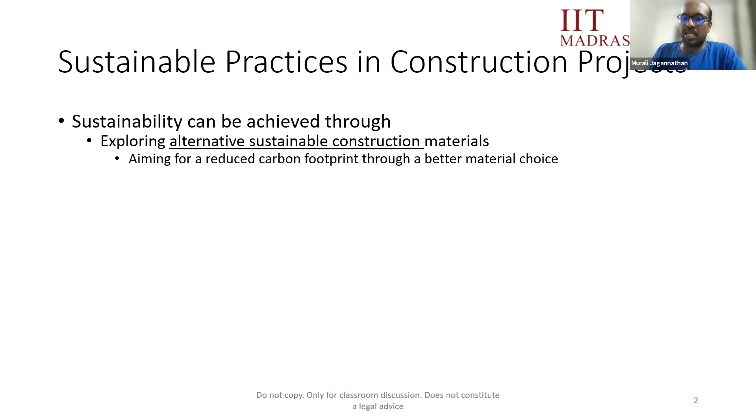That's one direction we look at when it comes to making our projects more sustainable, aiming at reduced carbon footprint through better material choice. The second is we try to improve our project performance through alternative construction processes.

If you take any construction project, there are two major things involved. One is the materials and resources you're going to employ in that project to deliver the final outcome. The second is the methodology or methods you're going to use to deliver this outcome.

Let's say, for example, I use certain equipment to deliver the outcome, I use some drawings to deliver the outcome. So I use certain processes focused on achieving the final objectives as agreed in the contract with my employer. Now, the problem is...

these processes that I follow in projects are mostly prone to delays. For example, you take any construction project, especially many public infrastructure projects, and we see that they are delayed.

There's a metro construction going on very close to my house in Chennai. It's been going on for 3 years. It's not such a massive project that it would take really 3 years to complete, but for some reason or the other, the project keeps getting delayed.

There's also a stormwater drain project going on very close to my house. It's quite a broad road, but almost three-fourths of it is closed because of this project, which has been running for 1 year. It's not a very mega project, it's quite small, and should not take 1 year—definitely 2-3 months, but not 1 year. Yet it's still going on.

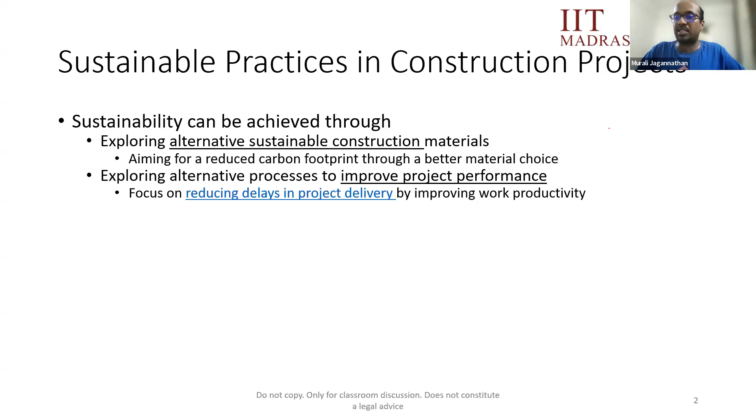If I don't do the work I have to do in a day, which is called productivity, my project is going to get delayed, and the delayed project has its own impact on the environment, on sustainability, and on the way of life, as we've just discussed. So in today's presentation, I'm going to focus on these two aspects when it comes to construction practices and construction projects.

When I say alternative construction materials or alternative construction processes, I am talking about something different from what we do regularly. And the moment we try to do something different, it is always met with resistance.

Because in general, as human beings, we are resistant to change. We don't want to change. We are happy with what we are doing. Yes, we may not be following certain sustainable practices, and we may not be following practices that actually help us complete the project on time, agreed. But when somebody wants us to change, we automatically feel the difficulty to change.

And that is a natural human tendency. It's not so easy to change things, and it is not so easy to change certain practices that you have been adopting for so many years.

The way I pour concrete is the way I pour concrete. And if somebody asks me to change the way I pour concrete, I will resist, because I am expert in pouring concrete the way I pour concrete. So why should I change?

I'm using normal Portland cement, ordinary Portland cement, OPC, since so many decades. Now you suddenly come and ask me to change to some sustainable variety of cement. Why should I change? I'm happy with what I'm doing. So that resistance to change is something that is actually inherently present in most human beings.

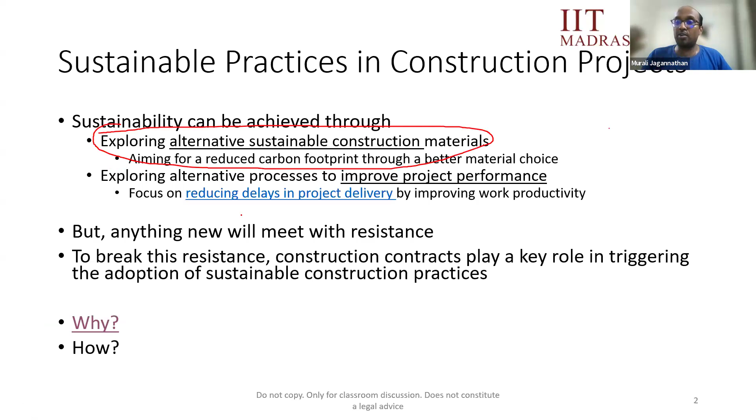We are all from academic institutions, right? As part of our day-to-day academic exercises, research is a very important component. We keep working on so many new ideas, especially our colleagues on the materials side. They do a lot of concrete testing and new mix designs aimed at improving the properties of concrete. Here in IIT Madras and most institutions, you keep working on new inventions that help the world be a better place.

Specifically, materials researchers and concrete researchers are known to come up with innovative mix designs that make concrete a better material. So you have rapid hardening concrete, ultra lightweight concrete, foaming concrete, self-compacting concrete - a whole range of different sustainable concreting alternatives.

A lot of students here, that is students of my colleagues from the material side, work on sustainable concrete. They try to come up with mix designs that replace conventional cement with more sustainable materials, to make the product less carbon intensive and less prone to carbon footprint. They're coming up with a lot of alternative materials, and they're quite successful in that.

They do some mix designs, cast some cubes, test it, and come up with interesting results. They're publishing in various excellent top-notch journals, getting international appreciation, presenting in conferences. Everything is good, and most of us here are doing that as part of our academic exercise - coming up with new and innovative ideas, publishing our research, and taking our academic profile further.

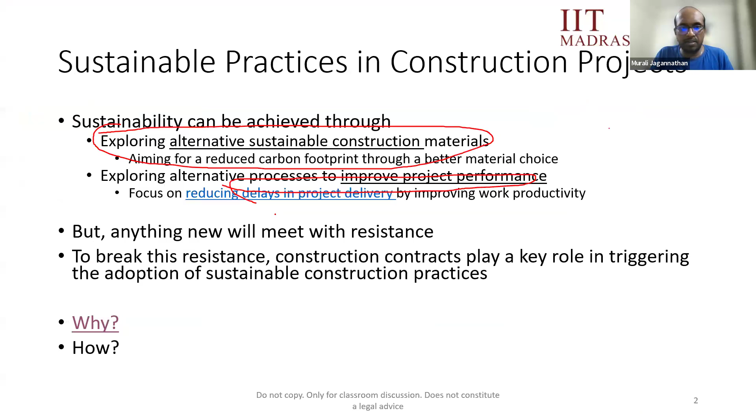And my next slide is going to be something about that. Dr. Suryadev Singh talks about planning and monitoring, and that's exactly what I'm going to talk about next. If you look at the way construction projects are actually executed... just give me a second... Yeah, sorry. So if you look at the way construction projects are executed, there is a fundamental problem.

Now what you see on the screen is quite interesting data that talks about the time and cost performance of our projects. This is particularly projects done at the central level, only certain projects valued at 150 crores and above. You find this in the report of the Ministry of Statistics and Programme Implementation, the MOSPI report. Look at these numbers: if it's time overrun, roughly 41.59% of projects suffer from time overrun. I'm talking about 1,500 odd projects, roughly, which is about 600 projects suffering from time overruns.

This time overrun, as I discussed with you some time ago, is directly contributing to unsustainable construction practices by affecting the way of life, regular traffic, and the sustainable development goals we have promised ourselves. Also, in terms of cost, roughly 20% of the project cost is suffered as an overrun. In numbers, this translates to 4.5 to 5 lakh crore rupees. Even if I don't bother about cost overrun at this point, I'm more concerned about time overruns, which is huge and having a huge impact on the way I deliver projects and the sustainability of construction.

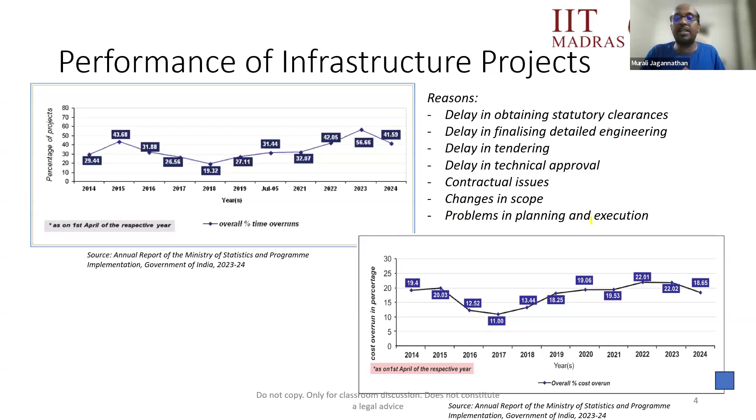Now, how do we control this? It's very easy to say don't delay, don't change the scope, do proper planning, do proper execution. All very easy to say, but how do you actually do that? Only when you control this can the project delay be controlled, because delayed projects impact sustainability, and this is where I am introducing you to the concept called lean construction.

A solution for all these delays, which according to me is a powerful solution, is what we call lean construction. This construction technique, if we follow it in projects, can actually reduce waste. One of the wastes we are talking about here is delay, and delays can be reduced if we put lean solutions into the project.

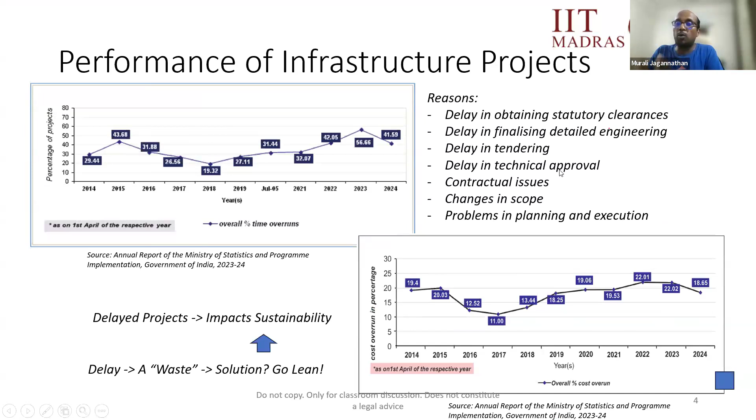Now some of you might be thinking, what is lean? Many of you might already know about lean construction, but I just want to bring in this concept with you all so that even if you already know about it, we go through some basics to bring us on the same page. Understanding lean construction is important because that is only going to help us in reducing these problems, and reducing these problems can take our projects to more sustainable practices. So, what is lean construction?

Lean construction is nothing but identifying certain wastes that don't contribute to project productivity, and eliminating the waste if possible, or if elimination is not possible, at least trying to reduce these wastes. When I say waste here, I'm not talking only about material loss - it is about time loss as well as value loss.

So let me give you an example. Let's say you're in a project. I'll take the example of Akansha because that's a familiar name here for me, but it can be anybody in that place. Let's say Akansha is my contractor, and I am the client.

As a client, I want to see progress in the project. Every day when I visit the site, I would like to see that today this column is completed, tomorrow one more column is completed, day after tomorrow the slab is cast, after that the second floor is started, then the third floor is started. I would like to see this progress happening day in, day out when I visit the site.

But when I actually go to the site, there was progress happening last week, but from the last 3-4 days, I see that nothing is actually happening at site. I can't see a new column coming up, a new foundation being cast, or a new slab being cast. But I am seeing that people are quite busy - they are doing something, but it is not actually contributing to the final product I want to see as a customer, which is the concrete structures being erected or constructed there.

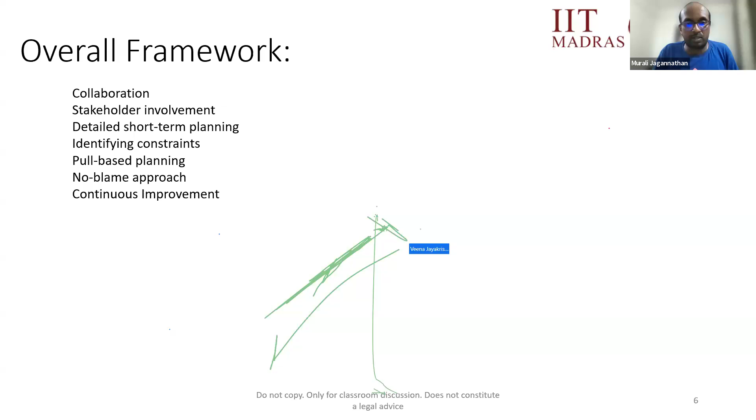Then there's something called continuous improvement. We should not be satisfied with what we are achieving right now. The moment we start following the other six principles and see that we start achieving our targets, we need to increase our targets to continuously move further ahead.

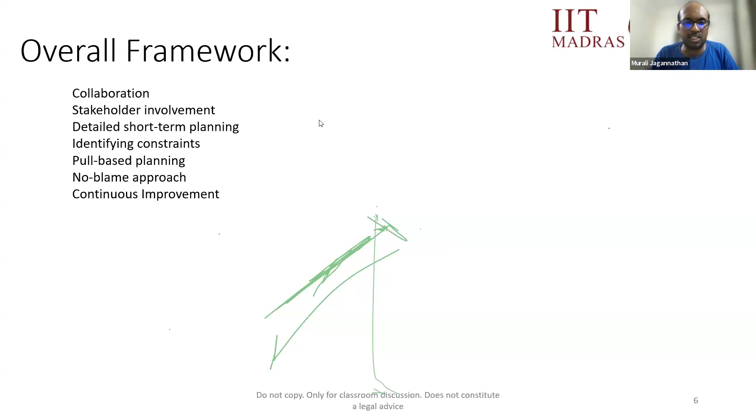So these are some principles that talk about lean construction. Doing this actually helps you to implement lean construction in projects. I'm sorry for that, one second.

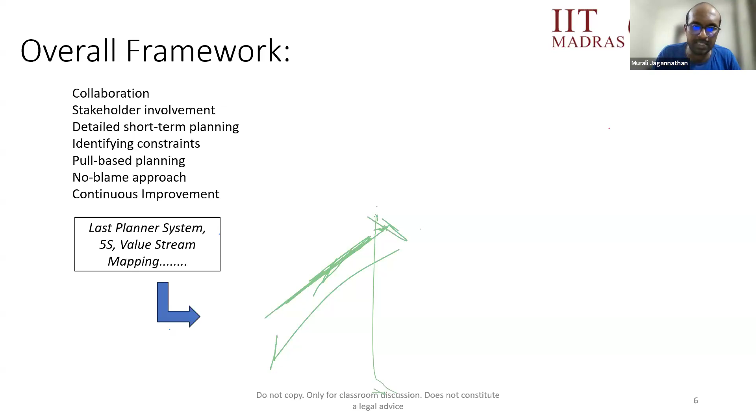So doing this through systems like the Last Planner System, 5S - these are some of the tools and procedures through which you can achieve these things. When you do this, you actually implement lean construction on the project. And when you implement lean construction, you reduce waste, reduce delays, and make the project more sustainable.

Now, you might still be wondering, where does contract come into picture? We spoke about contract and its strength, but where does it fit in? Contract is actually an enabler to implement lean construction. I told you that contract is a very powerful instrument that can help in bringing in the right behaviors. Lean behaviors are very nice, but very difficult to implement - that is where contract can help in achieving these behaviors.

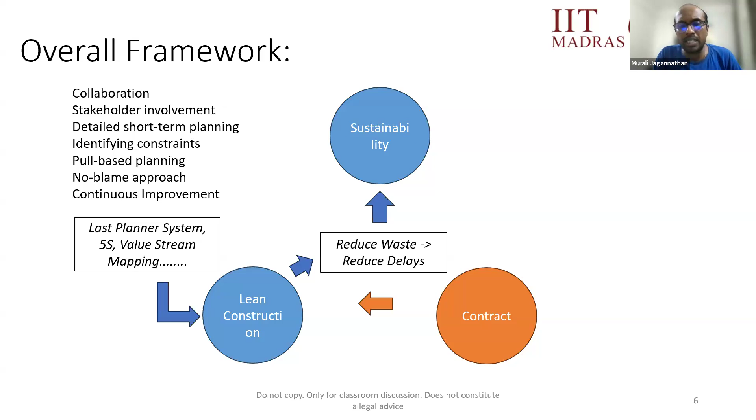Now, how can a contract help in achieving these behaviors? I'm giving you some examples, which I could keep elaborating on, but in the interest of time, let me keep it short and simple.

So when we draft contracts, they have to emphasize collaboration. I said the parties have to collaborate, but it's easy to say we have to collaborate - how do you actually make it happen? For example, if you want to make sure students work on a group project as a team, what do you generally do? Can anyone tell me?

Can anyone tell me, suppose you give a group project or group assignment, what do you typically do to make sure that the team works as a group and not as an individual-driven exercise? I have a technique to tell you, but some of you might already be doing that.

So you divide the work. That is one thing Jobil Varghese says - you divide the work and say you do this, you do this, you do this, and finally come up with the final product. That's one way. And Akash says progress review meeting - I ask them what you're doing, what you're doing, what you're doing, and you review that.

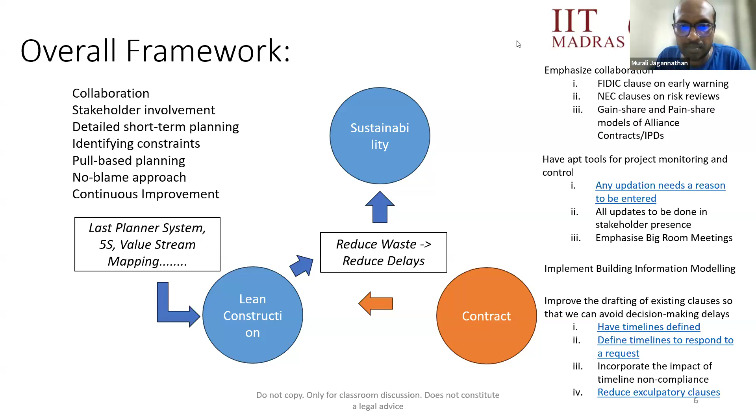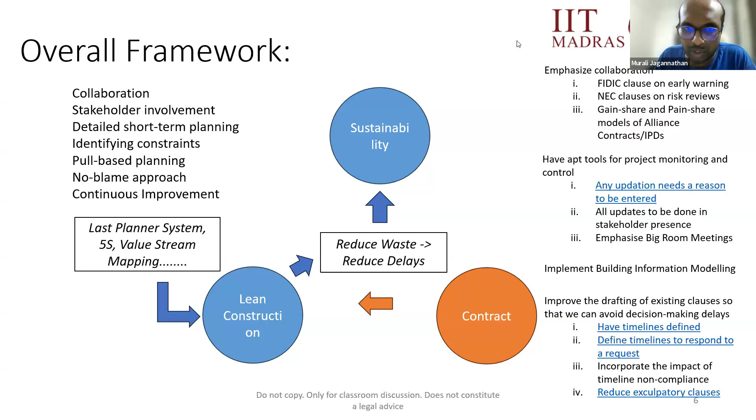Dr. Bharat Bhushan Jindal, you asked: doesn't litigation affect sustainability of the project rather than educating the contractor? See, litigation is caused because of contractual issues. If contractual issues are settled amicably, then why will litigation happen? It is definitely something we have to avoid, as litigation can lead to increase in delays in the project. But to avoid litigation, one has to be aware of the contractual responsibilities, and that is what we are trying to do here. Rather than keep looking at the contract and trying to safeguard your position and put the blame on others and go to litigation, collaborate and complete the work on time so that both you and the other party are benefited and the project gets benefited as a whole, rather than fighting litigation and other things. That's the point I'm trying to say, Dr. Bharat.

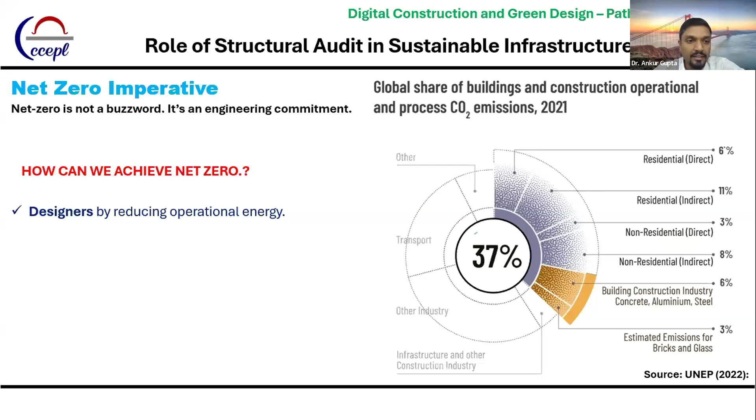So how can we achieve this net zero? We have different stakeholders. First, we have designers - what can they do? They can achieve net zero by reducing the operational energy of the building. Then we have material scientists who can innovate new materials and introduce low carbon materials into the building. Without expanding the list further, I'm coming straight to structural engineers - how they can play a role in achieving net zero.

Structural engineers, through audits, repair and rehabilitation, can extend the service life of assets, which will ultimately lead to net zero.

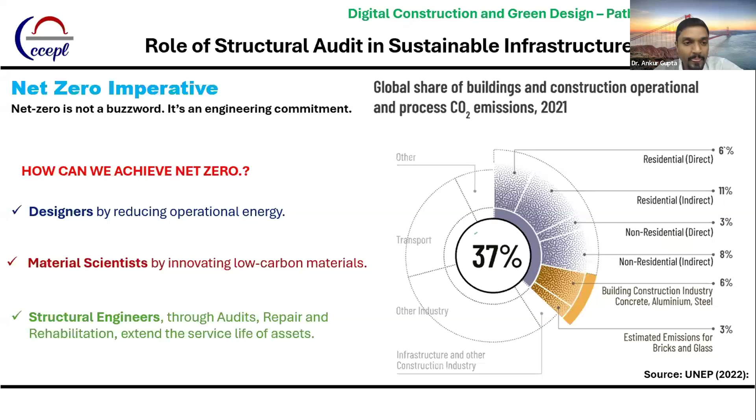The second term here is sustainable infrastructure. When we speak about sustainable infrastructure, what do we really mean? Generally it is linked to new construction. We often say that sustainable infrastructure is all about green buildings, new constructions, new buildings being designed and constructed. We have not really seen the concept of sustainable infrastructure applied to existing buildings as of now. But we can also serve society by providing sustainable infrastructure if we are able to extend the life of the already built environment.

If we are able to extend the life of what has already been built, then in some ways we are contributing to sustainable infrastructure. We all know that any building, bridge, or industrial facility embodies massive carbon, material, and energy investments. So if we are able to somehow save a building, we are indirectly saving a lot of embodied carbon emissions, a lot of materials, and a lot of investments. So we can say every building we rehabilitate is a step towards net zero.

This is for the structural auditors, for the structural engineers engaged in this field - whenever we are able to rehabilitate any building, we are actually contributing towards net zero.

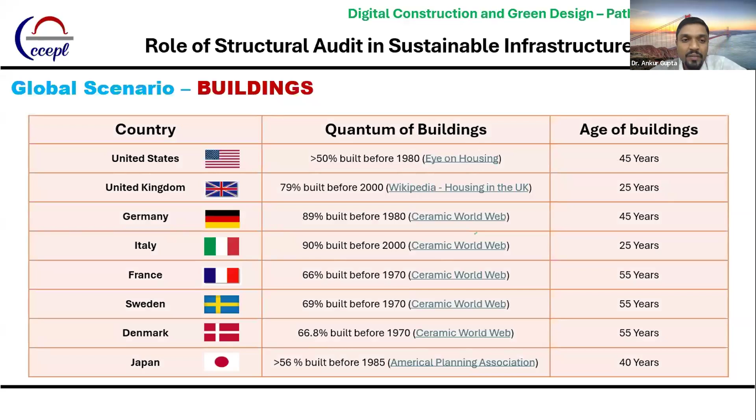But we have a choice now. If we are able to assess these buildings, maintain them, and properly audit them, then through repair, rehabilitation, and retrofitting methods, we can increase the life of these buildings. And by increasing their life, in some way, we are reducing carbon emissions from the environment.

If you see the scenario in case of bridges in the United States, approximately 36% of the bridges require major repair work or replacement. As a count, more than 42,400 are rated as poor, so the condition is very poor, meaning they have to be either retrofitted or demolished and reconstructed.

In Germany, around 87% of the road bridges and bridge substructures may require rehabilitation, and only 13% are in good or very good condition.

In Italy, the road bridges collapse at the rate of 5 into 10 power minus 5 per year, so 246 collapses have been documented till now. Similarly, for France, we are having 45,000 municipal bridges which require repair.

For Japan, it is expected that by 2033, 48% of the bridges will cross the life of 50 years, indicating a huge need for repair, rehabilitation, retrofitting, and audit. In Australia, approximately 70% of the bridges are over 50 years old. In Russia, 70% of the capital bridges were built between the 1970s and 1990s.

So this data gives us some message, some clue. Most of our built environment in terms of infrastructure is getting aged, getting old. It now requires some sort of assessment in terms of its safety, serviceability, and durability, so that a decision can be made whether we have to demolish the structure or we can continue it.

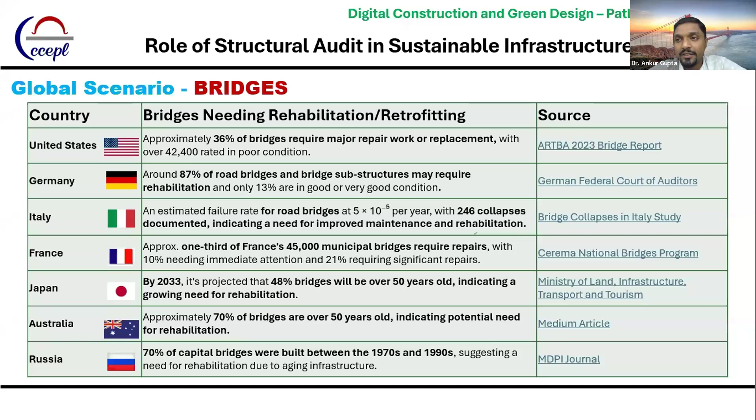If you see the Indian scenario, this is data from the last few years, basically from 2024 onwards. There are multiple such cases; I have just taken 7-8 cases. On May 15, 2025, in Ghaziabad, a balcony collapsed in Tulsi Niketan residential colony. The reason quoted was illegal construction and ignored complaints. Unfortunately, 2 died in this.

Similarly, in December 2024, in Mohali, Punjab, a 4-story building collapsed. Again, the cause was unauthorized excavation nearby and structural instability, resulting in 2 dead. In October 24, Bengaluru, and September 24, Lucknow, similarly in Surat Gujarat, New Delhi, Kolkata - all these are some of the few cases of collapses happening near us.

So there are some causes behind this. The main cause behind any collapse is ignorance regarding its maintenance, ignorance related to its assessment, its audit, and timely repair and remedial measures to maintain the building. Very small defects, like dampness issues or minor cracks, are ignored, or temporarily repaired without looking at the root cause of deterioration.

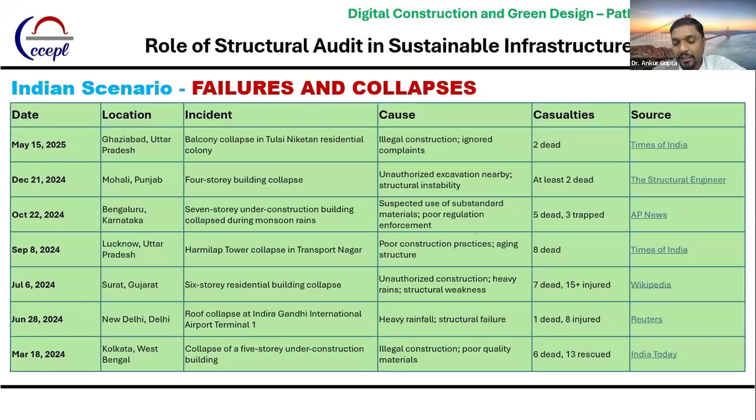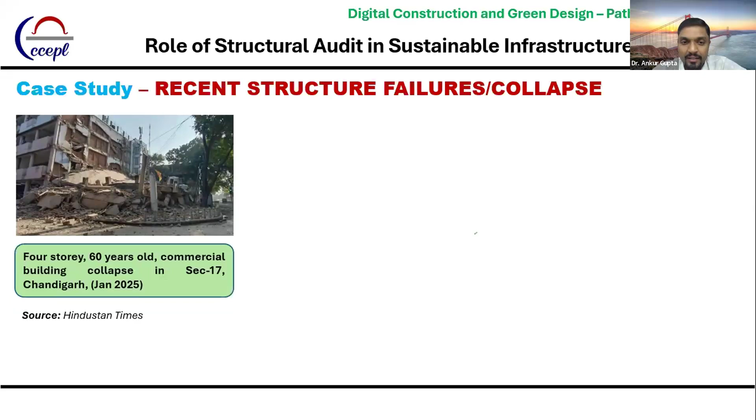So I have taken two details, two single slide studies. One is a 4-story, 60-year-old commercial building which collapsed in Sector 17, Chandigarh. I have a short video also which was viral online. You can see.

This building was not a planned demolition. It was a sudden collapse. Within a fraction of seconds, the entire building collapsed. Unfortunately, this building was about to be repaired or rehabilitated. There was no one inside because it was under renovation.

Why did it collapse? There are a lot of causes. Some say they did not provide proper temporary support. Some say the work was not going on in the correct way. Some say there was no assessment of the building prior to the rehabilitation work. But what we can understand from this collapse...

...factors such as the age of the structure. This building is 60 years old, and buildings are majorly designed for 50 to 60 years of life, or maybe up to 70 years. Now this building has almost crossed its life.

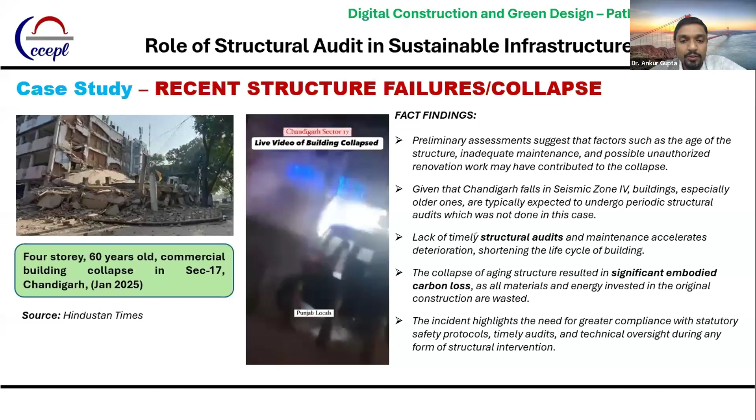One more case from Surat, where 7 were killed and more than 15 were injured. An 18-story residential tower pancaked and collapsed from the 6th floor to the first floor. There are certain more cases which have happened, and we can go into detail about why they happened and how they can be prevented.

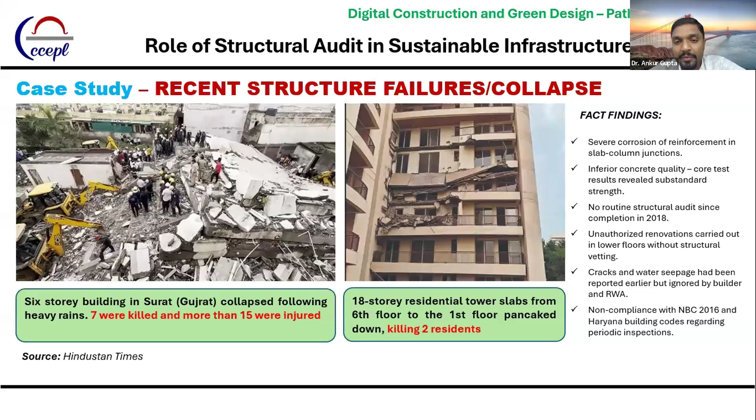We'll now come directly to the main topic of our presentation, which is the structural audit. This structural audit basically acts as a bridge between the safety and sustainability of the infrastructure. A structural audit can be defined as a systematic technical examination of any existing structure to assess its current condition, identify deterioration or distress, estimate remaining service life, and recommend appropriate actions including repair, rehabilitation, retrofitting, or demolition.

The decision whether we have to repair, rehabilitate, retrofit, or ultimately demolish the building has to be an informed decision. It should not be that a building has crossed certain years of life and so we demolish it. We have tools and methods available through which we can assess the remaining life of the structure, the properties of the material, and the durability, serviceability, and functionality of the building for future use.

Any decision regarding repair, rehabilitation, or retrofitting should be taken after a proper structural audit. I would like to spend some time discussing these 3-4 terms: repair, rehabilitation, retrofitting, or demolition. Repair is basically the cosmetic treatment of the building which does not give any benefit or advantage to the structural integrity or its performance.

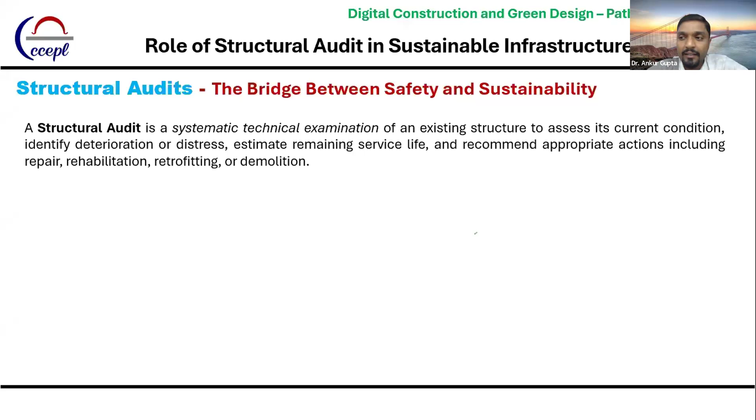Then demolition: if after analysis it is found that the cost of rehabilitation or retrofitting is almost 70% of the cost of new construction, we may decide to demolish the building instead, because retrofitting may require a very high level of supervision, while after demolition a building can be constructed easily.

So, what is happening these days in the name of structural audit is that people go to the site and do only a visual inspection. They just look at the building, click some photographs, and make inferences about cracks or dampness found. Actually, this is not the full structural audit.

This is just one aspect of the structural audit, termed the preliminary visit. In visual inspection, we have to look for specific things in the building. If a building is being assessed after an earthquake, the auditor must have enough knowledge to identify which elements may show which kind of distress.

If the auditor is looking at a beam with different types of cracks, they must be able to clearly classify and define them. A crack running throughout the beam parallel to the reinforcement means something different than one at the center of the beam, or one near the support in an inclined direction. For any sign of distress, the auditor must have enough knowledge to understand the probable cause.

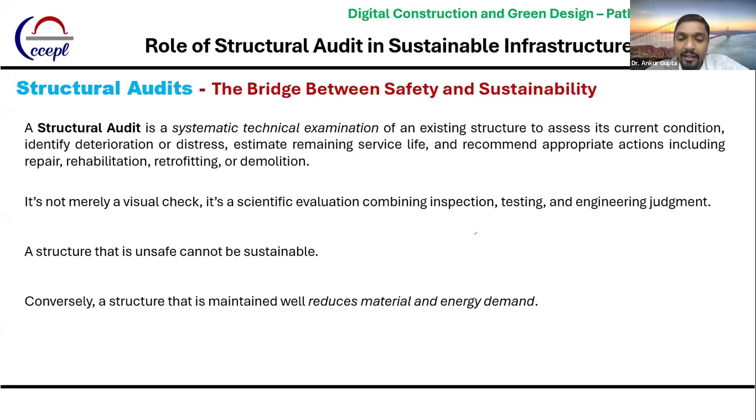Now, why are audits critical to the built environment? There are multiple reasons for going with a structural audit, and multiple ways it benefits the built environment. The first is sustainability goals: through audits, we are able to reduce construction waste.

If we can give the building more life through proper assessment and remedial measures, we reduce the construction waste that would result from demolition. By preventing demolition, we also save natural resources and energy that would be consumed during new construction. This also aligns with green building principles, which is another target we can achieve through these audits.

For aging structures, we can evaluate the integrity and remaining service life, and if found possible, enhance the durability and extend the usable lifespan of the existing asset. Truly speaking, approximately 90% of structures that undergo audits are able to get additional life through repair, rehabilitation, or retrofitting. So there is hardly 10% of buildings which cannot be retrofitted or enhanced for durability and lifespan. We can easily enhance the durability and life of a building if it is properly audited and remedial measures are planned based on the root cause of deteriorations and defects.

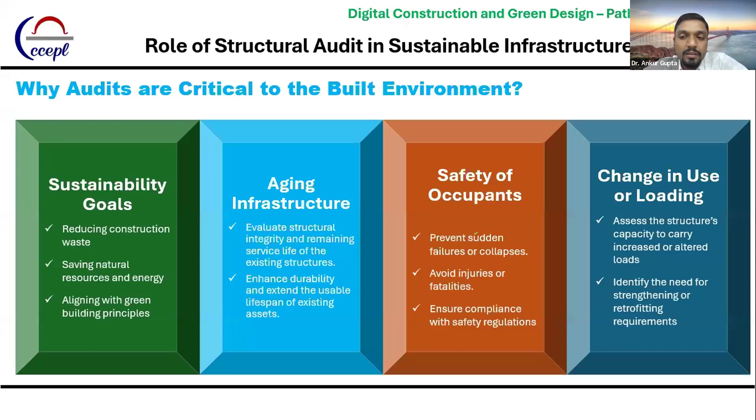For example, a G+2 building constructed 20 years back - now they decide to add 2 more floors. The building foundation and the existing 2 floors might not have the capacity to sustain the further loads of 2 more floors. So in this case, we have to strengthen the building foundation, strengthen the G+2 arrangement first, and only then can we go for vertical expansion. This is possible through proper structural audits and assessment.

Next is cost-effective maintenance. If we have timely audits, we will spend very little on maintenance activities because we are arresting defects and deteriorations at an early stage. This lowers overall maintenance cost and reduces chances of emergency interventions, which are many times always costlier.

Regulatory compliance - these audits are also meant to fulfill regulatory compliances, comply with legal requirements, avoid penalties or notices, and provide documentation for clearances and certifications. This is also one of the reasons why we go for structural audits of the built environment.

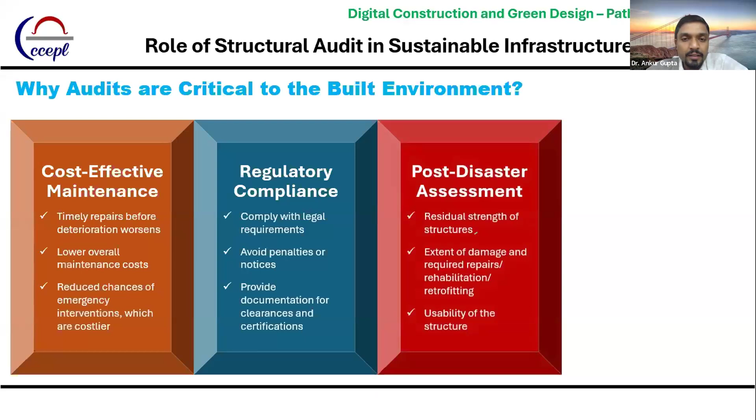Post-disaster assessment - we can take it as a forensic assessment also. If there is a disaster, an earthquake, and post that earthquake a building is distressed, showing signs of distress, then the audit is mandatory. We have to first go for the structural audit to check the residual strength of the structure, whether it can be further used in its current condition or needs strengthening or retrofitting before any use, to assess the extent of damage and required repairs, rehabilitation, and retrofitting. The usability of the structure is also assessed through proper structural audits.

Then insurance and valuation. As of now in India we are not directly linking this to insurance and valuation, but abroad it is a practice that before getting any building insurance and valuation, we have to go through proper structural audit, and based on the audit report findings, the insurance and valuation is decided. This will be coming to India also, very soon in the next few years. So this audit will aid in property valuation for buying or selling purposes.

Before buying or selling any property, we have to go for a structural audit. For example, if you are going to purchase a flat, not a new flat but a second-hand flat, we have to first go through the structural audit. We should ask whether this building has been audited earlier or not. If it is audited, you should see the audit findings, which will clearly show the condition of the building, and your decision may depend upon those findings.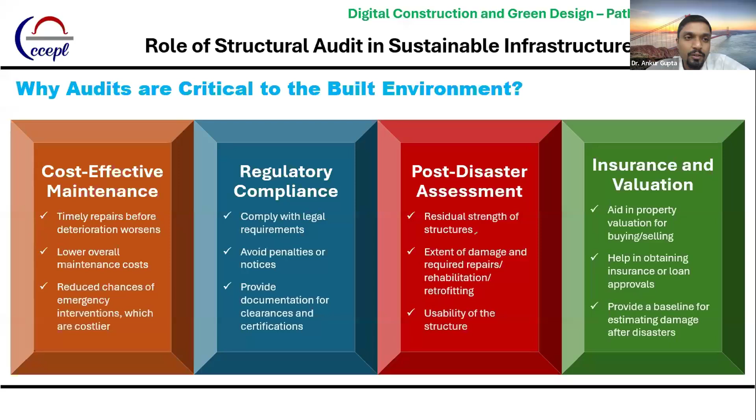It will help in obtaining insurance or loan approvals, and it will provide a baseline for estimating damage after disasters. So these are some of the purposes for which audits are used in the built environment.

Now let us proceed with the audit methodology, how these audits take place. We have seen what a structural audit is, its role in the built environment, and why we go for it. We have also seen cases of buildings and bridges requiring structural audit because of age. Now let's look at how we carry out the structural audit.

The very first step in the structural audit is the document review and critical visual inspection. Whenever we go for an audit, we first ask the client for proper documents of the building: as-built drawings, design documents, layout plans, structural drawings, and any earlier repair or strengthening work carried out.

We also ask for maintenance records. So all these documents we have to ask from the owner first, and then we go for a thorough review of those documents. From those documents, our critical visual inspection will be directed, telling us what we need to look into when we inspect the building.

This is a very crucial step, but it is generally ignored. What we often do is, whenever there's a need for an audit, we straight away go to the site and start doing the audit. However, the correct way is to first investigate, ask for the documents of the building, and based on those documents plan your inspection—deciding what to look for, which should be determined by reviewing the documents.

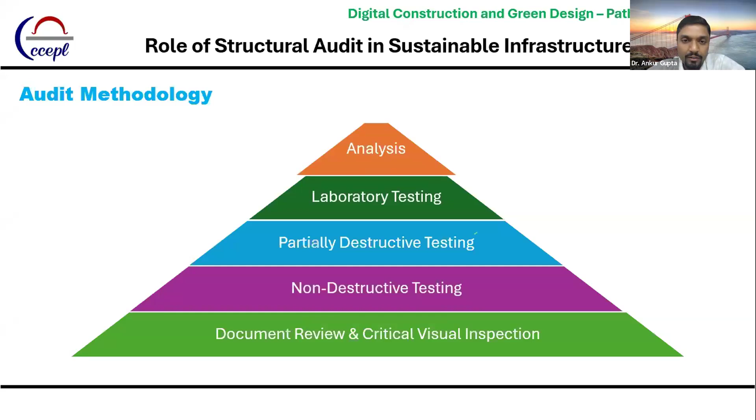So why are these multiple steps important? Why do we need this systematic inspection methodology - first the document review, then visual inspection, then NDT, PDT, then lab testing, then analysis? Why not directly inspection and report? So this is a synergy of multiple tools. Why are we doing so?

By integrating data from multiple sources, a more holistic view of the structure's health may be developed, considering both the surface and the internal conditions. By visual inspection, we will be able to just see what is at the surface. Through testing, we are able to quantify the extent of the deterioration. And through laboratory testing, we are able to find out the properties of the material, the chemistry inside the material.

So this integrated approach reduces uncertainties and leads to more accurate diagnosis of the problems, enabling better informed decisions about repair and rehabilitation. This is very much important. If we want accurate diagnosis of the problem, we should always go with the correct approach, which is inspection, then testing, and then analysis.

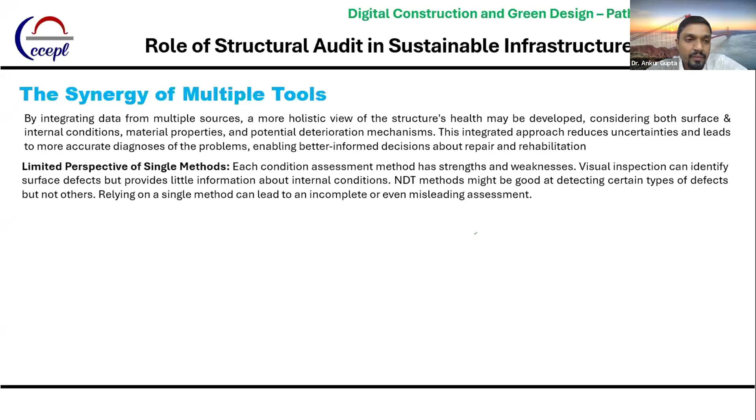So these are the reasons why we are going with multiple tools - unique insights from different tools. Visual inspection provides only a qualitative overview of the structure's surface condition. NDT methods provide quantitative data on the in-situ properties of materials and the presence of hidden defects. And laboratory testing provides detailed information about the material composition, strength, and deterioration mechanism.

So this integrated approach helps us in diagnosing the deteriorations and the issues correctly, thereby helping us in taking informed decisions about the repair, rehabilitation, and retrofitting of the structure.

For example, visual inspection might reveal cracking, which can then be investigated further using NDT to determine the extent and depth of the crack, and laboratory testing to understand the cause of the cracking.

So one way is just we are having a crack, we will Google some crack repair methodology and do the repair. The second approach is we are having a crack for which we are not certain what kind of crack this is, what is the cause of this crack, and we should go for the NDT test for the crack to find out the extent of the cracking.

And if we are not able to find out the cause of cracking further, we can go for laboratory testing to understand the cause of the cracking. So this NDT might indicate a potential problem area, which can then be confirmed and characterized by core sampling and laboratory analysis. This is where the PDT and laboratory test come into picture.

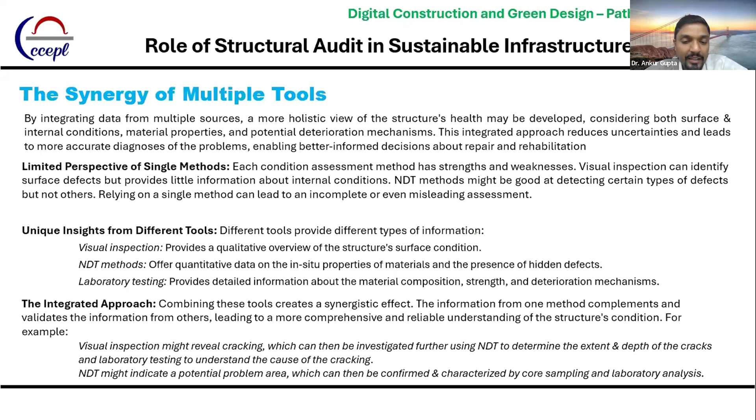Now we're having standards also, and very soon we are about to get our first Indian standard for the building services, which will be focusing on the audit of structures. It will be in wide circulation next month, and probably we will have our first Indian code for structural audits next year.

Stage 3 is strengthening or intervention design by the structural engineer and vetting by the structural auditor. Stage 4 is the implementation of stage 3 by the executing agency, and stage 5 is the post-implementation audit for verification of the executed work. So this is the complete process of the audit.

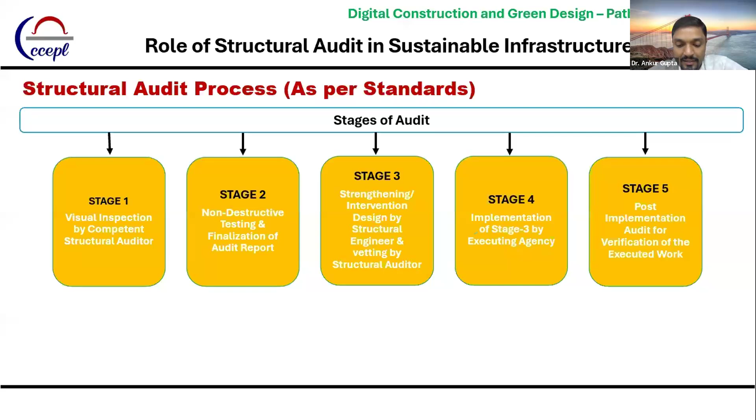So if you are going through an audit, you might be going through only stage 1, stage 2, stage 3, stage 4, or stage 5 - the complete process will be through these 5 stages. Or if you are having some stage 1 investigations and planning for remedial measures, then post-implementation of those remedial measures, the building needs to be again assessed to check whether the identified distresses or issues are being resolved or not.

This is a stage by stage process. I have taken 2 stages only for the audit. This is the complete audit process.

If we are talking about stage 1, we first have to identify the aim and objective of the audit and the scope of work. Whenever we are going for a structural audit, whether we are the owner or the auditor, it is very important for both of us to understand the aim and objective of the audit and the scope of work that has to be included.

Once we have defined the aim, objective, and audit scope, we have to appoint a structural auditor. The structural auditor then carries out the visual inspection of the structure. After visual inspection, a report will be prepared, and if the aim and objective of the structural audit is fulfilled, then the audit will close here itself. Stage 1 audit may close here.

If there are no findings, no suspicion, no requirement for quantitative analysis, then we may end the audit process at stage 1 itself. But if the aim and objective of the structural audit is not fulfilled, we have to move to stage 2. Stage 2 will lead to the damage and deterioration assessment and material evaluation.

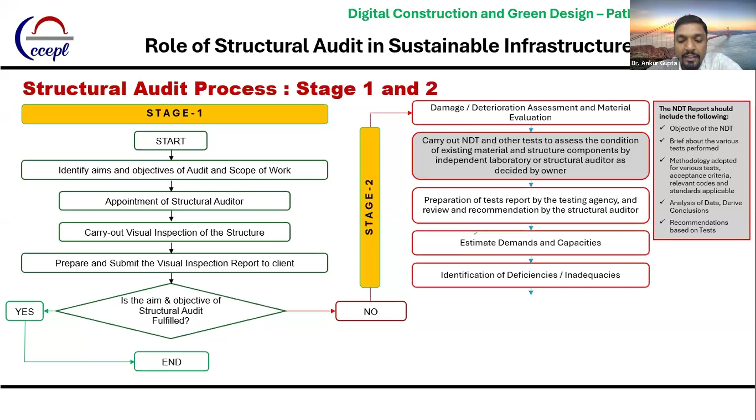Then preparation of the final report, which will be submitted to the client for review. The report will be based on visual inspection findings, review of design and drawings, NDT and other tests, and assessment and suggestions for the future course of action will also be given. So the report on demands on as-built structure, report on existing component capacities, and report on deficiencies and recommendations for further action - this will be part of the report.

So stage 2 is crucial - stage 1 and stage 2, both are crucial. From stage 3, we'll start the development of remedial solutions: the retrofitting design, the rehabilitation design, the strengthening design. That will be a broad topic we'll take up at some other point of time.

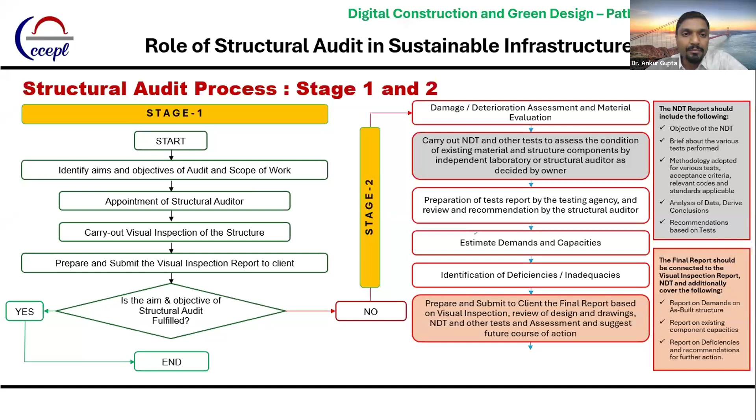Critical visual inspection is simply like we have to look for something in the structure. But for NDT, we have different methods and different tools available through which we can assess the building.

The very first is the cover meter test. We have different types of instruments available in the market which are capable of identifying the location of the rebar as well as the cover to the rebar - whatever reinforcement cover is available and wherever the rebar is located. So we are able to find this out through these instruments.

This is used for quality control, to ensure correct location and cover to reinforcing bars after concrete placement, and it can also be done for existing structures - investigation of concrete members for which records are not available or need to be checked.

We often have a deficiency of drawings - in most cases you're not able to get the structural drawings or even the layout plans of the building. In those cases, these instruments can help us in preparing layout plans and as-built drawings, by identifying the location of the reinforcement, the spacing between the reinforcement, the cover to the reinforcement, and all these things. This data can be further verified through other modes of testing.

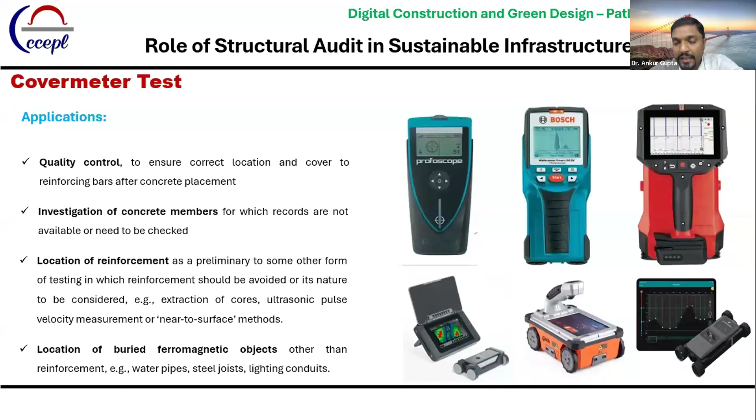Location of buried ferromagnetic objects other than reinforcement, water pipes, steel joists, lighting conduits, etc. can also be detected using these instruments. So we have multiple options available in this instrument. It's not that it will detect only metals - there are modes available for detection of wood, plastic, and other metals. So based on the required inputs, you can choose a mode of operation for these equipments.

Next is the rebound hammer test, which is basically used to check the surface hardness of the concrete surface. We can assess this using the rebound hammer. We have different kinds of rebound hammers available - P type, N type. Earlier we had the original Schmidt rebound hammer, which was analog type, and nowadays we have fully digital rebound hammers which can directly give you the value of compressive strength also.

Although the compressive strength is not reliable using rebound hammer, unless you have carried out a correlation between the rebound values and the core compressive strength. It says it is used for assessing the likely compressive strength of concrete with the help of a suitable correlation between rebound index and compressive strength, developed in accordance with clause 5.2 of IS 516. There is an IS code available with guidelines through which you can correlate the compressive strength of concrete with the help of the rebound index.

Generally, there is a graph provided along with this rebound hammer. What people do is directly perform the rebound hammer test, take average readings using 6 or 9 rebound indices, and based on the graph, predict the compressive strength of the concrete - which is actually not the correct way. If you have to estimate the compressive strength of concrete in an existing structure, it should be done strictly in line with clause 5.2 of IS 516 part 5 section 4, because the graph was developed in the laboratory under standard conditions on a standard cube. So the same graph cannot be directly applied to the site.

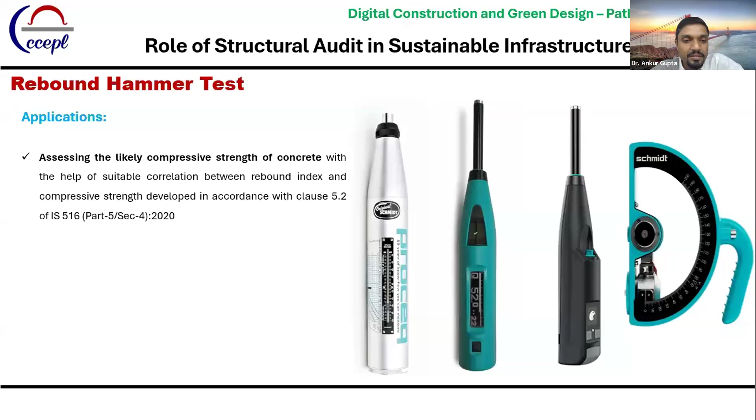In simple terms, if there is a huge structure where concreting was done in a single go from the same material and grade of concrete, you can extract 9 samples of cores from those elements and perform the rebound number test at the same locations, along with the UPV test also. There is one more criteria - if the UPV value is more than 3 km per second, only then can we consider that location for correlation. If the UPV value is less than 3 km per second, we may not consider it. Based on that correlation curve, you can predict the compressive strength for the remaining structural elements. This is the correct way to assess compressive strength.

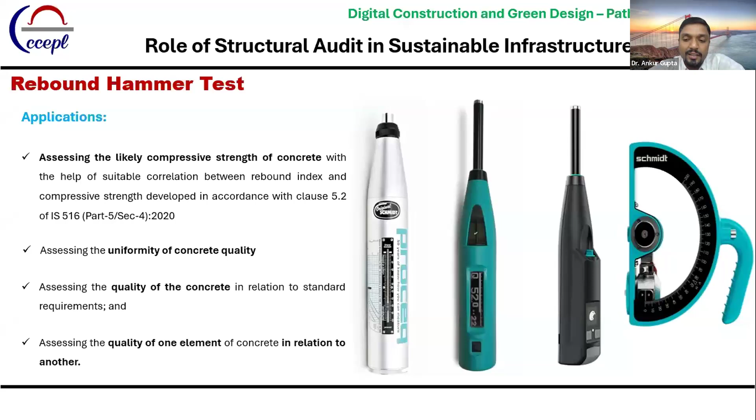Second is the assessment of the uniformity of concrete quality - this is the main purpose of this test. We want to assess the uniformity of concrete quality within the same element or among different elements, or compare the surface hardness of one structural element with respect to another. This includes assessing the quality of concrete in relation to standard requirements, and assessing the quality of one element of concrete in relation to another. These are the purposes of the rebound number test.

Then comes the ultrasonic pulse velocity test. These are the different kinds of equipment available in the market for the ultrasonic pulse velocity test.

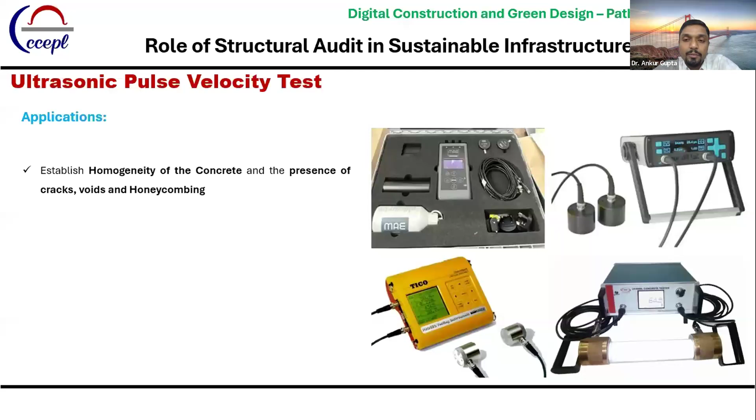The purpose of this test is basically to check the homogeneity of the concrete and the presence of cracks, voids, honeycombing or hairline cracks inside the concrete. This is like doing the assessment of the internal properties of the concrete, since we cannot see the concrete visually from inside. Rebound hammer number will not give you any information of the concrete from inside. This UPV test will help you in giving that information.

So the quality grading of concrete is based on the pulse velocities as per IS code. There is a table which says the quality of concrete will be doubtful, good, or excellent based on the velocity criteria.

Estimating the depth of the surface cracks is one more application of the UPV. If you are having cracks over the surface of the concrete, we may estimate the depth of those cracks without actually drilling a core. But that estimated depth will have some variation, it has some limitations. So ultimately, if you want the most accurate crack depth estimation, there is no better option than coring.

To determine the dynamic Young's modulus of elasticity, we can determine this also using the pulse velocity test.

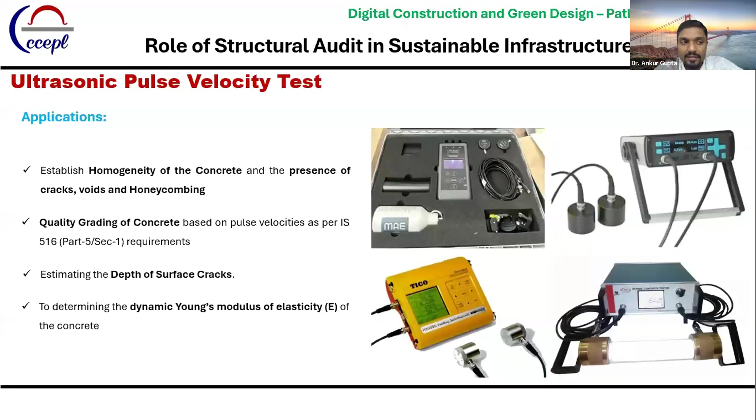If the resistivity is high, it means there is very less chance or lower probability of the reinforcement getting corroded. If the resistivity is low, it indicates that the concrete is a bit porous and there is high chance of the reinforcement getting corroded. So this resistivity test will in some way give an indication of the likely corrosion activity happening inside the concrete.

Concrete resistivity is a measure of the ability of the concrete to resist the flow of electrical current. Simply, once the electrical circuit is completed, the flow of current will be tracked, and you will get the resistivity value from the concrete.

In the context of corrosion, the lower the resistivity, the higher the likelihood that the steel reinforcement will corrode. High resistivity concrete tends to slow down the corrosion process because it impedes the movement of ions necessary for the electrochemical reactions that cause corrosion. It only gives an indication of the risk of corrosion, not the actual corrosion rate. Again, this is an alternate to the half cell potential test or the iCOR test, which are used for assessing the probability of corrosion and the rate of corrosion. Through this test, we can have an indication of whether we need to further assess the same area of the structure, or we can simply skip that area.

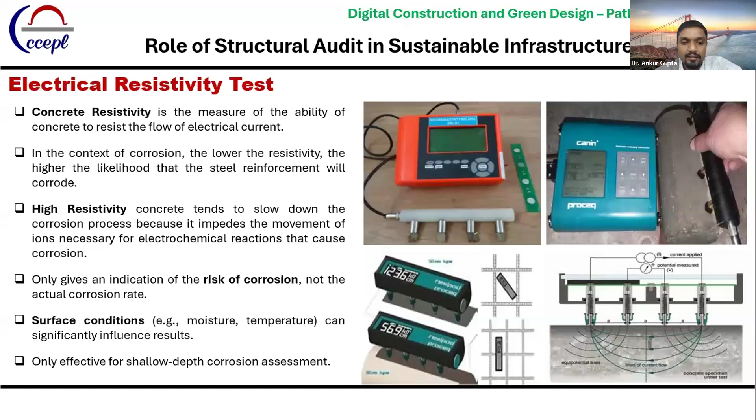Surface conditions, for example moisture and temperature, can significantly influence results. So resistivity values are influenced by the presence of moisture and temperature, and they are only effective for shallow depth corrosion assessment. If you have a deep concrete member, say with a depth of 300 mm or 400 mm, and the reinforcement is present beyond that, the electrical resistivity method may not be able to accurately assess the resistivity of the concrete up to that depth. So this method may not be that successful if we have very deep members or the reinforcement is buried deep inside the concrete.

Then comes the half cell potential test. These are the different methods and equipment available for the half cell potential test. This is basically a half cell which completes a circuit when it gets connected to the reinforcement and the concrete. This half cell potential test will be giving us the probability of corrosion.

Again, this test is not going to give us the rate of corrosion, with what rate the corrosion is happening. It will not give you that. What it will give you is the instantaneous indication, at the time of testing and at the location of testing, of how much probability there is of corrosion.

So generally we use a half cell, which is a copper sulfate solution, and the cell will be completed through the concrete. We'll attach this correct clip to the reinforcement and check for the potential. If you're getting potential in the range of minus 200 or more positive, this will indicate very less chances of corrosion happening at the time of testing.

If it is between minus 200 to minus 350, there will be corrosion activity, the probability will be uncertain. 50% chances the corrosion is happening and 50% might not be happening, so we are not able to correctly predict whether there is corrosion or not. If the value is between minus 350 to 500, there is a very high rate of corrosion, 90% probability that corrosion is happening at the time of testing. And if the value goes beyond minus 600, minus 700, this is a case of severe corrosion happening in the reinforcement.

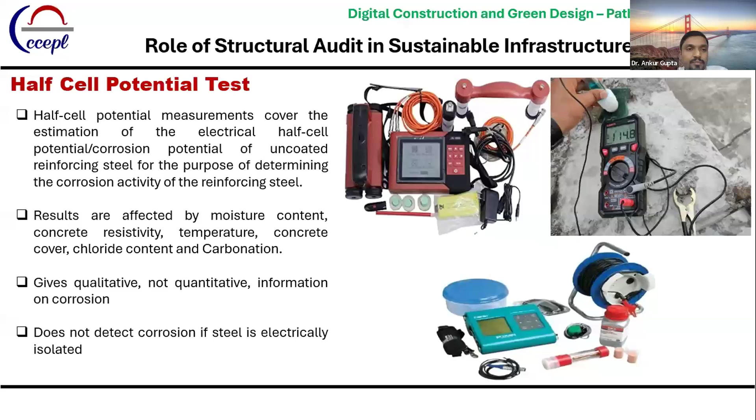Then comes the ultrasonic tomography. This is basically the advanced version of the pulse velocity test. In pulse velocity test, we have two probes which give us information inside the concrete. In ultrasonic tomography, we have a multiple array of probes, like 8 channel, 24 channel, 32 channel array, which infers the quality and property of the concrete from inside.

So it's used for determination of the thickness of the concrete element, concrete quality assessment, and verification of the presence or absence of structural defects such as voids, delamination, and honeycombing. The purpose is again the same, but it will give you the information with more accuracy.

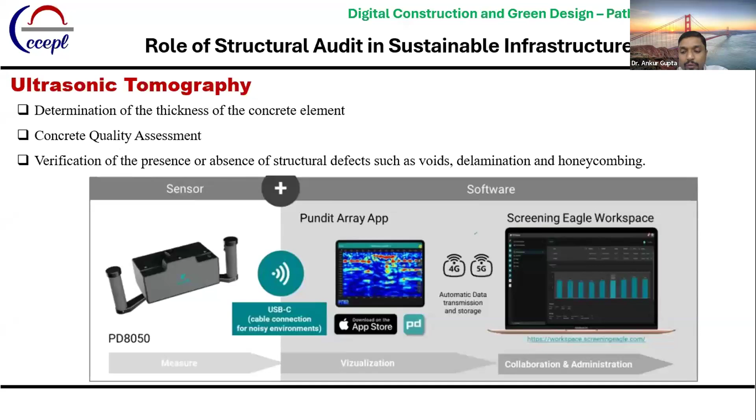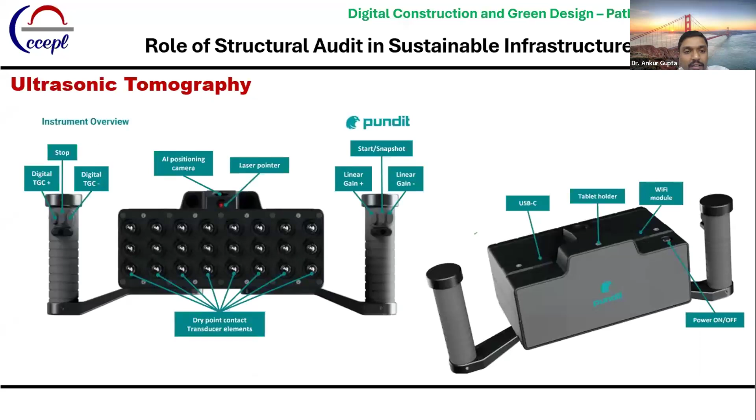So this is the equipment. In UPV we are having only 2 probes. In this, we have multiple channels, 1 to 8 channels, each having 3 probes, and this is how it will work.

From a single probe, the pulse will be initiated and it will be received by the remaining probes. Similarly, the process continues, and the rest of the probes transmit waves which are received by the rest of the probes. After combining all this, it gets the information about the quality of the concrete from inside. So it is a much more accurate and precise method of getting information about the homogeneity and integrity of the concrete, about the presence of cracks, voids, or delaminations inside. This also gives us the thickness of the concrete element. We get some back wall echo through this instrument which indicates the presence of the end of the element, and we can estimate the thickness based on the back wall echoes.

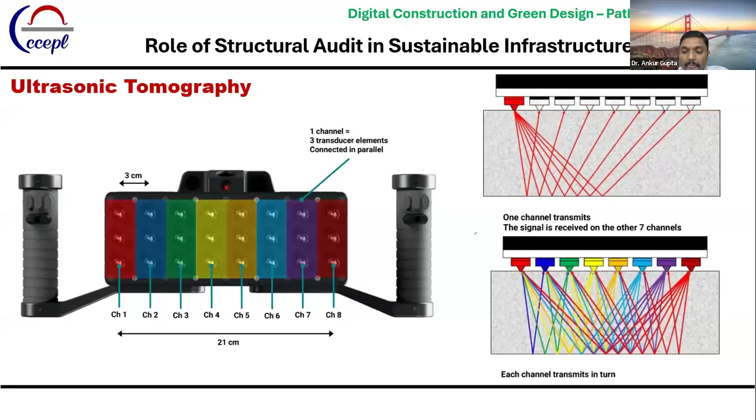Then comes the carbonation test. This test is basically done to check for the depth of carbonation inside the concrete. It is most applicable for old structures, more than 15 or 20 years of age, in a condition where there is presence of carbon dioxide in the atmosphere, and there are very high chances that the concrete in the peripheral elements is getting carbonated. In such cases, it is important to check for the depth of carbonation, because carbonation is something which will ultimately lead to corrosion.

We have primarily 2 types of corrosion: one is carbonation induced and one is chloride induced. If the corrosion is carbonation induced, we can detect that using this carbonation test, which can be conducted on extracted cores or on freshly broken concrete surfaces. Sometimes we can also do this by drilling inside the concrete and spraying the phenolphthalein indicator. If the indicator changes color from colourless to pink, it indicates that the concrete is not carbonated.

If the color is not changed, it indicates that the concrete is carbonated. Generally, a pH of 9 to 9.5 is the benchmark. If the color is not changing, it indicates that the pH has reduced below 9 to 9.5. And if the pH is reduced, it will ultimately initiate corrosion by breaking the passive layer around the reinforcement, reacting with the Ca(OH)2, converting it into calcium carbonate. So there is a chemistry behind it.

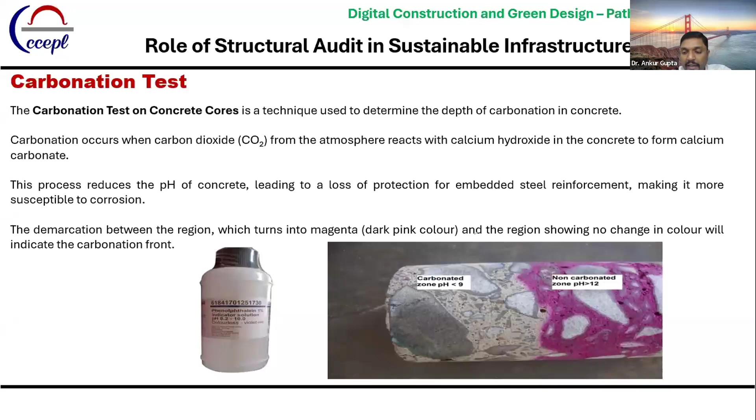Now coming to the digital transformation in structural audits. So as of now, we have seen there are tools available for assessment of structures. With advancement in technology, we now have tools available which can further help us become more precise about the findings of the audit. The first one is BIM-enabled audits.

So what we do in this, if we have a structure which is 30 or 40 years old, and we don't have structural drawings available with us, a BIM model would not be possible otherwise. What we can do instead is create models using the visual inspection findings, on-site measurements, and testing results. We create these models using software tools like Revit, Tekla, or ArchiCAD. We can also take help from laser tools and drones, using photogrammetry to capture the as-built geometry of the structures more accurately. All these things can be incorporated into the model.

Then, whatever model we have created, we embed data into those elements. For example, we have findings of the audits in the form of crack locations, carbonation depth, core test results such as compressive strength, or pH, chloride, sulfate content values, or UPV values or the corrosion map. We can geotag and tag all of these to the respective elements in the model. Each data point also carries its metadata in the form of test date, result, technician, severity, and temperature conditions. Everything will be there with that tagged data.

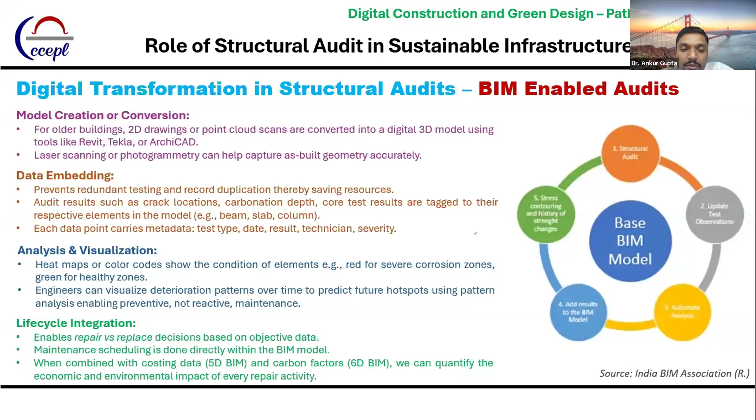When this is combined with costing data and carbon factors, that is 5D and 6D BIM, we can quantify the economic and environmental impacts of every repair activity. So if we want to go beyond assessment and repair remediation to economic and environmental impact, we can further feed the BIM model with this information of costing and carbon factors to get this.

Next is drone-based audits. Earlier, if we had to audit a bridge over a river, a 20-story building, a flyover with a very busy road, or a bridge over a railway, such conditions were almost impossible to audit. But with the introduction of drones and the implementation of AI in audits, it is now possible to go for structural audits for such kinds of conditions and structures.

In the past, inspecting the upper stories of a facade, the soffit of a bridge, or the crown of an industrial chimney meant scaffolding, rope access, or heavy staging, which are expensive, risky, time-consuming, and most of the time impossible to conduct.

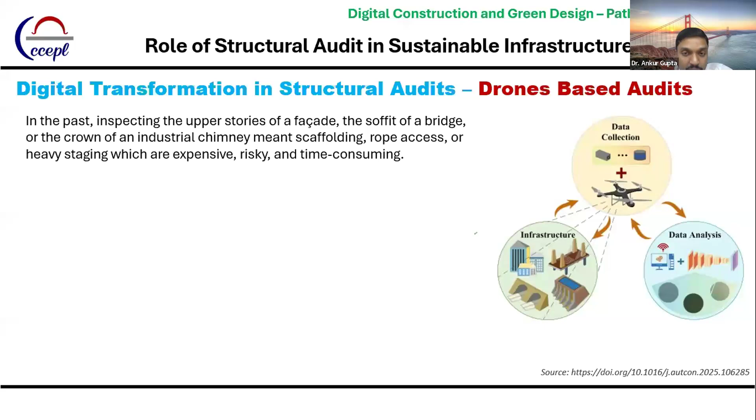Today, drones are redefining how we audit and inspect our structures. These drones are equipped with high-resolution RGB cameras, lidar scanners, or thermal sensors to capture aerial, high-quality images of the structures. We can load the drone with any kind of instrument we want, whatever information we require from the building or infrastructure.

The data captured using drones is directly integrated with digital platforms such as BIM. So whatever information we get from the drone, we can directly feed this data to the BIM model, as we have seen how BIM is revolutionizing structural audits.

There's one more thing: with drone-based audits, the time of audit is also reducing significantly. For the audit of a multi-story building, suppose a G+20 building, it usually takes around a month or two with proper scaffolding and safety arrangements. But with drones equipped with high quality RGB cameras, lidar scanners, and thermal scanners, we can do the audit of the same building in merely a few hours. It takes only hours to scan, audit, or visually inspect the entire building facade, which earlier could have taken a month or two. This drone-based audit has significantly reduced the time of audit.

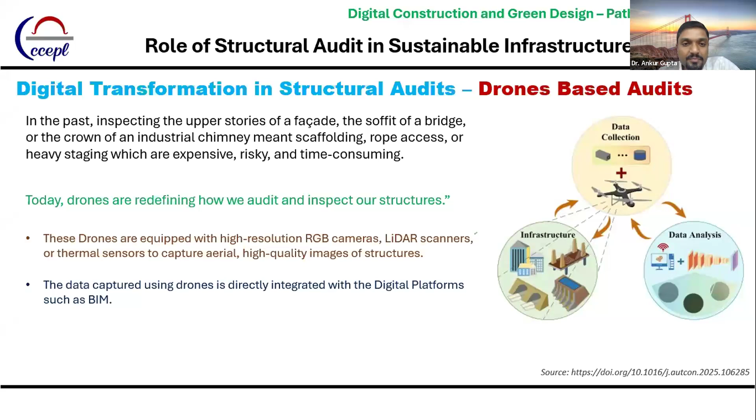Then comes sensors and AI in audits. We are having a lot of types of sensors used for structural health monitoring these days, and artificial intelligence is also coming into this to predict deteriorations, predict defects, and predict the level of damage in buildings and structures.

There are a number of applications. We can have different kinds of sensors which can give strain values, crack information, settlement information, and information about the rate of corrosion, the depth of corrosion, and carbonation. Even strength values can be predicted using those sensors.

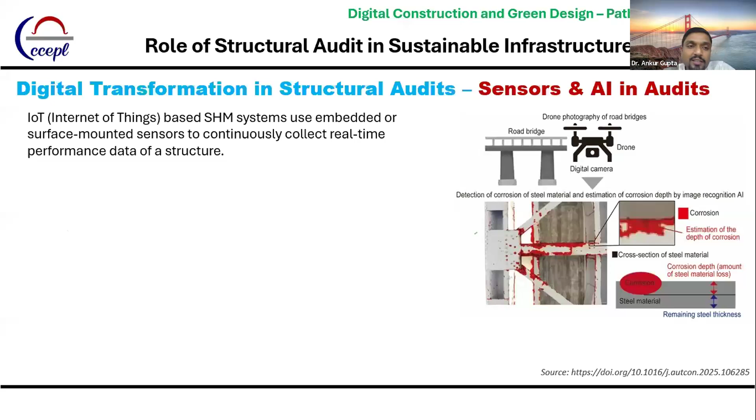IoT-based structural health monitoring systems use embedded or surface-mounted sensors to continuously collect real-time performance data of a structure. For structures like dams and bridges, these instruments play a vital role and are a mandatory part of the structure. If you're constructing a dam, it is mandatory to install sensors in it. For bridges, it is now mandatory to install sensors to monitor deflections, rate of corrosion, appearance of cracks, and strain levels.

Strain gauges, accelerometers, corrosion probes, crack sensors, temperature and humidity sensors are the different kinds of sensors which can be installed inside the concrete to get real-time information from those structures. Based on this real-time information, we can go for real-time preventive measures to help keep the structure out of a danger zone. Artificial intelligence and machine learning enable automated recognition, prediction, and decision support from large volumes of audit data, such as photographs.

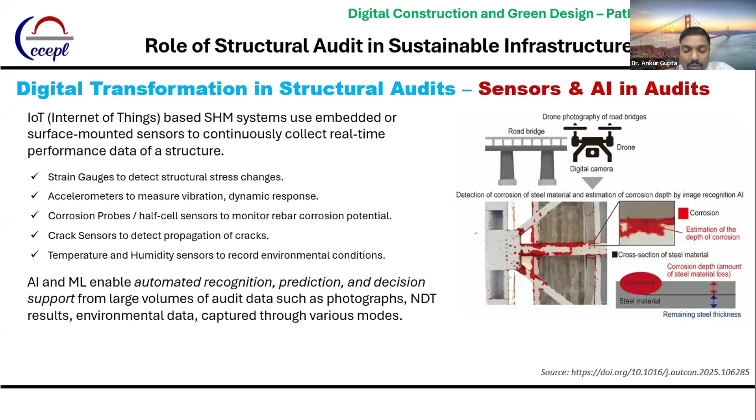Now when we are having a lot of data and we are putting the data at a single place - suppose in a BIM model we are feeding all the information, or we are training our different softwares. So having a lot of data, based on that the AI can itself predict what kind of deterioration is this. Although it is not 100%, right? If we are getting information only through AI, it will not be accurate. Human intervention is again required just to validate and verify the data.

So these are the digital transformations in structural audits. Drone-based audits can be used for construction purposes for buildings. In the energy sector, we can use it for power lines, wind turbines, photovoltaic plants, pipelines. And in the transportation sector, we can use this for bridges, pavement, railway, sky rail, embankment, tunnel. There's hardly any sector where this UAV inspection is not applied.

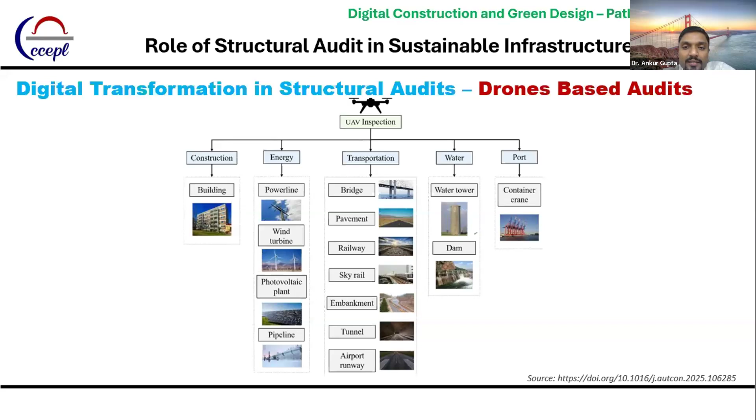So this is all about the structural audits, the digital transformation in audits, and net zero. So I'm open to any discussion.

Hello sir, Dr. Nakul Gupta this side. Yes sir, I was having one question. Do we have any other method apart from this for measuring carbonation?

Because as we have studied, around pH level 10.5 to 11 our corrosion starts. But phenolphthalein solution usually detects this thing after the pH goes below 9. So, apart from some new technologies like the rainbow indicator - and as we know the rainbow indicator is comparatively costly - do we have any other method?

We can go with the accelerated carbonation test, but again, as of now, for carbonation we're having this phenolphthalein indicator and the rainbow indicators only. Okay, I think so, sir.

We have few questions in our chat box also. Someone asked: is the rebound hammer test really reliable? Because according to him, it is based on surface hardness of concrete, and relating hardness to compressive strength seems to be a bit out of way. Your views, sir?